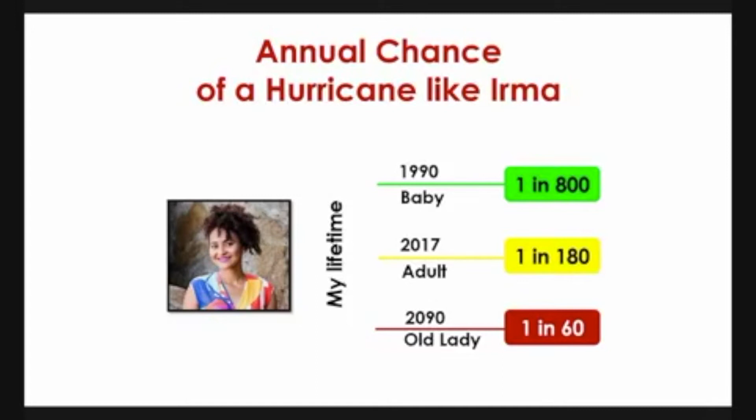Absent any measures to curtail further greenhouse gas emissions, we estimate that by 2090, that probability will have increased to 1 in 60 in any particular year.

When events like Irma become far more frequent, the results will be devastating, until slowly society adapts to the new reality. You've just heard an excerpt from the foreword to the Irma Diaries, written by Kerry Emanuel, a world-renowned meteorologist and professor of atmospheric science at MIT, where he also co-directs the Lorenz Center dedicated to learning about climate. He specializes in tropical cyclones with a focus on hurricane physics.

I want to pair that with a very brief excerpt from the afterword to the Irma Diaries, written by our very own Professor Michael Taylor, who is a senior lecturer and professor in the Department of Physics at the University of the West Indies Mona campus. He is also a director of the Climate Studies Group at Mona. His research interests center around enhancing an understanding of the Caribbean-specific impacts of climate change.

And he says, in a real sense, Irma portends the future challenge of climate change for the Caribbean region. That is the challenge of living in a new era, likely consistently marked by climatic events only rarely seen to date, or by climatic events that have never been experienced before. It is the challenge of living with the unprecedented.

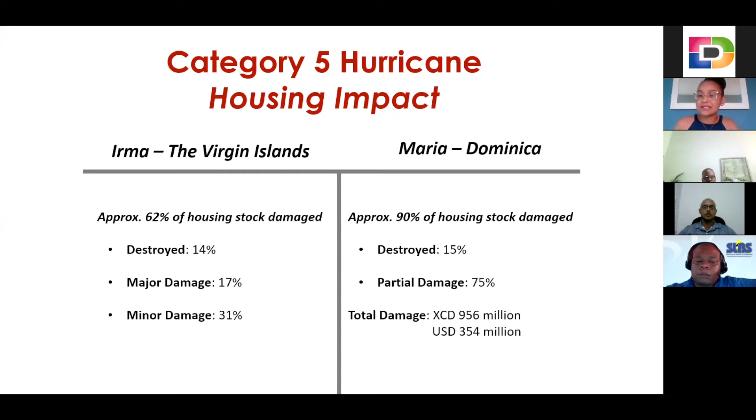So this evening, what I would like to bring to the table is 4 lessons coming from very human, very real, very true experiences from the Hurricane Irma experience that speak directly to windows and doors.

I chose to focus on that this evening because I think we focus a lot on roof and other elements of the structure, but windows and doors are really critical elements that matter significantly in terms of how well your home will survive these types of intense storms.

So the first lesson I want to share with you is that you do not live in a sterile environment. By this, I mean your home is perhaps only as resilient as your weakest neighbor is. So you can't just think about the resilience of your home, you need to think about the resilience of your neighborhood. For this, I will be sharing from the story, Phoenix Rising.

The last call I received was from another cousin in the building who lived on the floor below and had a clear view of our unit. 'Cuz, do not go to your bedroom,' he warned. Of course, as though the warning were a direct invite, my human curiosity instinctively directed me straight to my bedroom.

I glanced through the cracked door. The second tower and its antenna were dangling from cables. The antenna was wildly swinging back and forth, beating against my bedroom window as if knocking on our home, requesting permission to escape the madness outside.

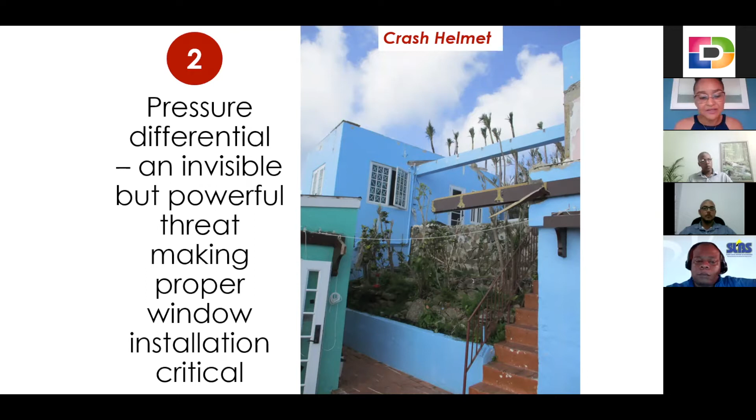Before I had a chance to think, boom, the entire bedroom exploded and the bathroom followed shortly after. Everything went flying, including the toilet. A wall was not left standing. Between the force of the explosion and the winds, I was thrown about 20 feet from the front of the bedroom, clear across the room and down behind it. Elaine was thrown as well.

So a very important lesson on pressure differential and the risk that it poses.

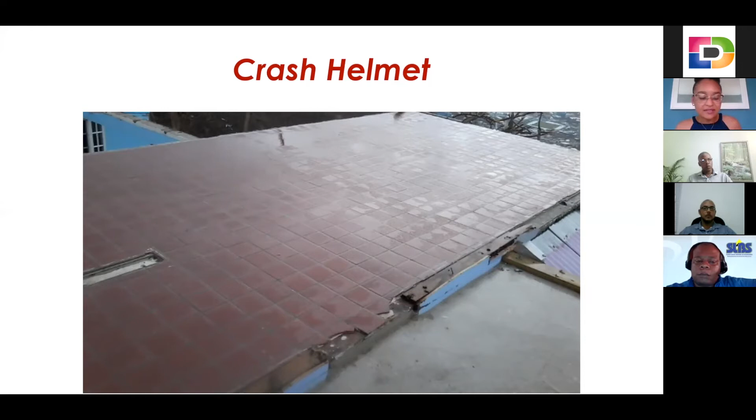The third lesson I would like to share is that windows are often the first point of impact in a hurricane. In fact, I was interested to look back at the 25 stories in the Irma diaries and realize just how many of them started with a simple breach to a window. And not only that, but hurricane shutters can fail, especially under the circumstances of these very strong hurricanes, a Category 5 hurricane.

So for this, I will share with you from the story Gunpoint. A small rectangular glass strip across the top of the wooden living room entrance door allowed us to witness the first strike. It started when the big mango tree that towered over the outside deck gave way, collapsing in front of the entrance door. Shortly after this, we heard a relentless banging coming from upstairs. Peeping out, Tishan realized that a hurricane shutter on one of the windows had come loose and decided that she could fix it. She braved the storm and went upstairs.

With that under control, it was only moments before another issue caught on and intensified. It was now the hurricane shutter in my bedroom that had come loose and started to slam against the closed glass window. We shut the bedroom door that led to the living room to isolate it. Behind the closed door, we listened as the shutter beat the window without mercy, each blow sounding worse than the one before. Then there was quiet. The banging had suddenly stopped as the winds finally took the shutter away.

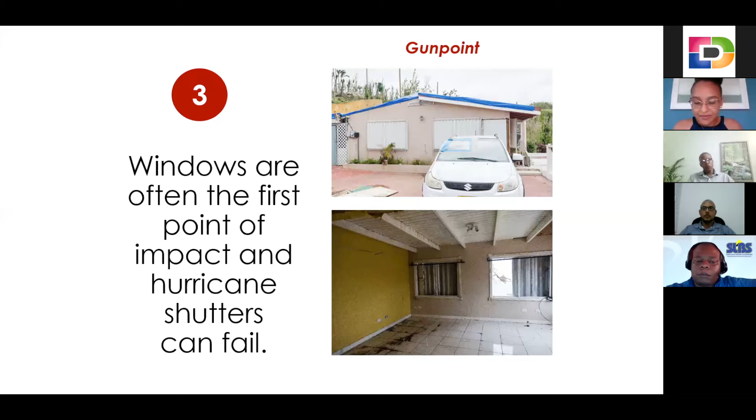Christine and I scrambled behind Chelsea and Tishan into the safe room with only enough time to slam the door behind us before we heard what sounded like a massive explosion. In one fell swoop, everything north of that safe room, including the two bedrooms and the living room, was no longer standing, and the daylight, previously shut out by hurricane shutters, walls, and a roof, poured in. The house was an open sepulcher.

The final lesson I wish to share with you this evening from Hurricane Irma is that doors can also be an important point of vulnerability, in particular your double entry doors or double balcony doors. For this, I will share with you from the story 21 years ago. And I want you to pay attention to that little concrete casing you see on the screen. I'll explain to you the significance of that after.

Back on the main floor, things quickly spun out of control. Standing in the living room, I noticed that one of the interior sheetrock walls started to collapse in my direction. There was no exterior breach to the lower part of the house at all, but the sheer pressure and wind force was shifting the wall off base. In pure desperation, I took another length of 2-inch by 4-inch wood, propped it up against the base of the wall and nailed it into the floor to try to hold the wall in place.

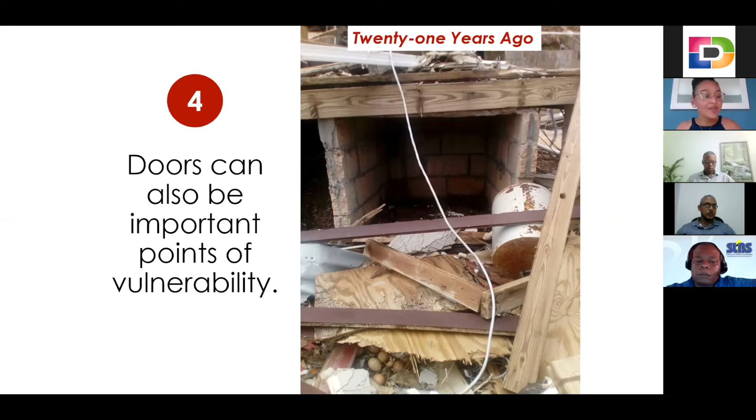So with that, I'm going to end my segment of the readings and just quickly share with you, I think, 2 very practical and important tools that you can use right here in St. Lucia to go about the business of making your home more resilient.

The first is the Act to Adapt app. This has recently been launched by the SLDB, the St. Lucia Development Bank, through its climate adaptation financing facility. Essentially, it's a web application. Anybody who can access a website through a device can use the app. It is freely available and it helps homeowners to basically go through a very simple step-by-step guided assessment to understand.

Actually estimate the level of impact that their home would experience in a Category 5 hurricane, but not just that, actually understand the points of weakness, points of vulnerability in the structure, and be able to appreciate the types of improvements that they can make and actually see how those improvements will up the ante, will actually help them to increase their resilience. So I encourage everybody to check out that app.

I think this is such an important facility, again, administered by the SLDB, actually as a component of the Disaster Vulnerability Reduction Project. And this is an opportunity for homeowners, business owners, farmers to access very low cost, affordable financing to be able to implement any measure, including putting in hurricane or impact resistant windows and doors that would build their resilience to climate change impacts, including stronger hurricanes.

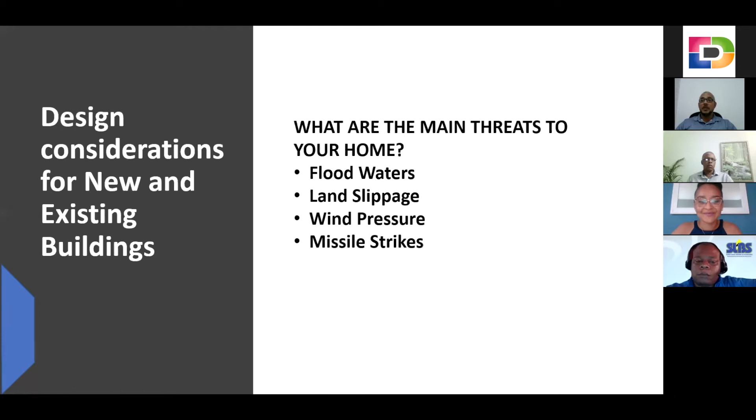Land slippage as well is something that's common to us. However, those two are not usually something that you personally can do much about. It usually has to do more with what is in the community, what is in the neighborhood, the infrastructure in place. But apart from appealing to the authorities to ensure rivers are cleared prior to the hurricane season, one of the main things you can do, if you're building or planning on building, is get a professional to do some soil tests for you.

Check to ensure that the area you're building is stable. There are many areas in St. Lucia whose soil types don't really support large houses. And especially, you have to look out for the drainage in the area where you're going to build as well. If you're just buying land, look for an area where there's proper site drainage, large box drains to take all of that rainwater away.

If you have built already, try to ensure that all of the rainwater coming off of your roof runs down drainage pipes and into your site drains, which then connect into the community drains. It's important because you'd be surprised how much water comes off of your roof, and the larger your house, the more water you have coming off of that roof. If all of that water is going into the soil directly around your foundation and you're on a slope, you're making that soil more prone to slippage.

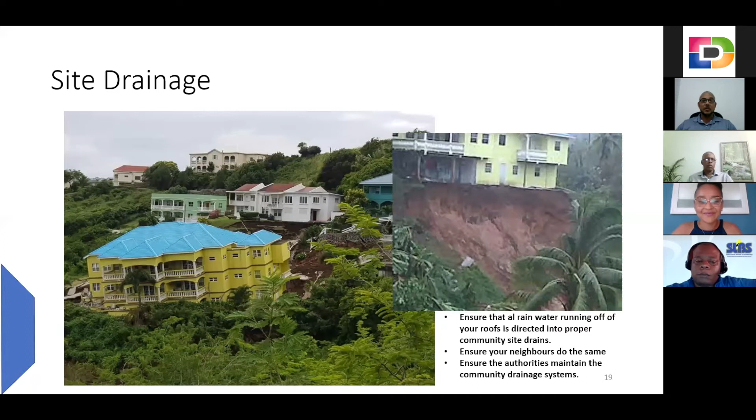Whoops, it looks like Jamal's internet is frozen. While we're waiting to have him come back, perhaps I'll go ahead.

This is Terry Ort from Domus. So if you do get reconnected, Jamal, please just come in. But in the spirit of keeping things going, first of all, there are many different roof types, and just to say that the hip roof is the best kind of roof to have, because it has the least amount of impact or exposure to the winds.

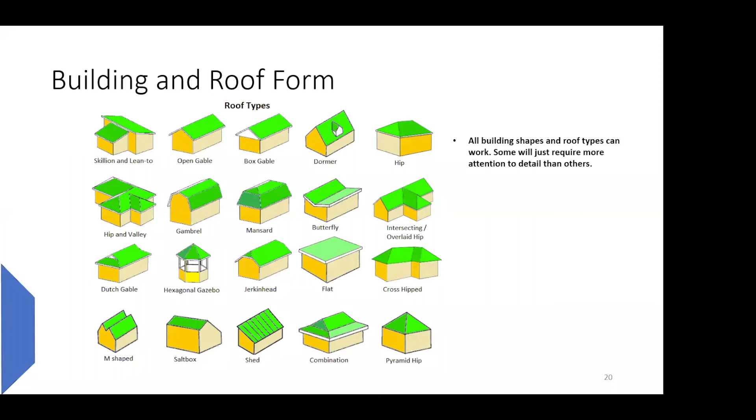Yeah, it looks like Jamal's dropped out. So what happened? I apologize, I'm not sure what happened. Where did I get cut off?

You just before we pulled up the slide, you talked about the house sliding down. So I pulled up the roof and was just mentioning hip roofs are probably the best to have. But go ahead, okay, all right.

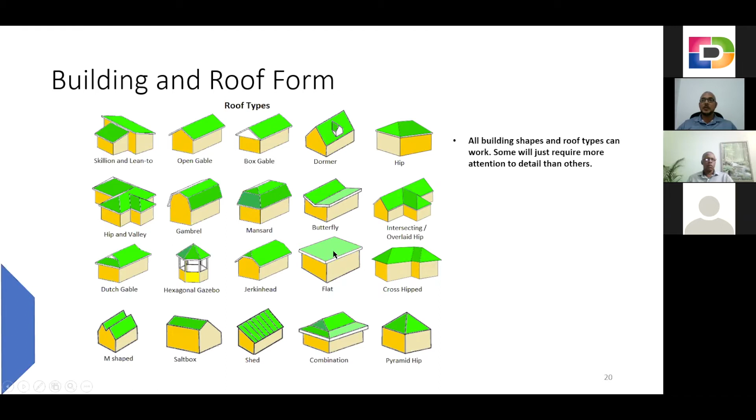This slide gives you an idea of most of the types of roofs used in the Caribbean and most parts of the world. The best design for our region is the hip roof or a flat concrete roof. Gable roofs are fine as well, as long as they're well braced. Let's move on to the next slide.

Now in the Caribbean, the sweet point for a roof, the most adequate slope, is considered to be a 30-degree roof. A 30-degree roof typically holds up best in a hurricane. Anything steeper, and what happens is if this side of the roof is steeper, you start to get more pressure against it.

Also, on the other side, you will get more suction because as the wind goes over, it creates that swirl and pulls against the roof on this side. A shallower roof would have less suction on this side, but on the side taking the wind, you will actually build up suction as well, the shallower your roof is. A flat concrete roof will get suction on it too, but because it's concrete, it's not as easy for it to be lifted off.

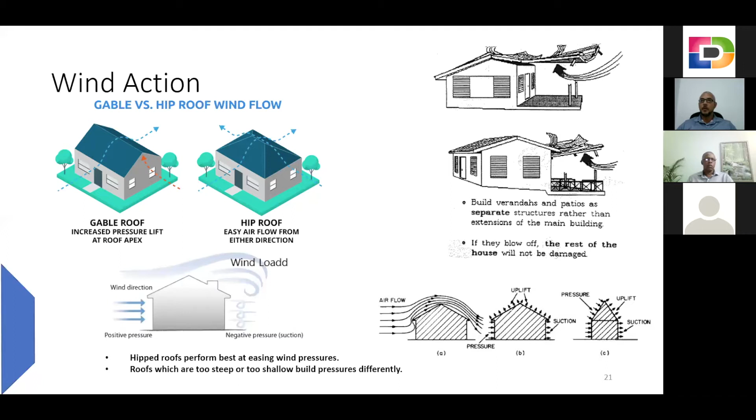So if you are designing or building, this is a suggestion for your balcony roofs: try to separate it from the main roof. If you have an existing house and your balcony roof is connected to your main roof, it is still within the realm of possibility to remove the roof over the balcony and create a second section of roof just below the eaves of your main roof.

Next slide. Okay, so here I would like to speak to what happens when, as Angela said, one of the main ways houses are destroyed in a hurricane is when windows and doors fail. Whether it's because you didn't have impact-resistant windows or the windows weren't pinned properly, you need to ensure this is understood — this is how the wind reacts when it enters the house.

If the wind comes in through one window and there's no other opening, it is going to try to find an exit. It is either going to blow out another window or it is going to go up through the roof and rip the roof off.

Open plans and cross ventilation will help save your roof by having another window blown out instead. In other words, if there was a window on the other side of that wall, the wind could rip straight through the house. Of course, it would take all of your belongings, but your roof might still be saved. If you don't have cross ventilation and there are a lot of walls between one window and the other, it's the same thing — wind pressure will build up in there and the roof is liable to be lost.

Couple of points. The size of your windows obviously makes a difference. The bigger the window, the stronger it has to be.

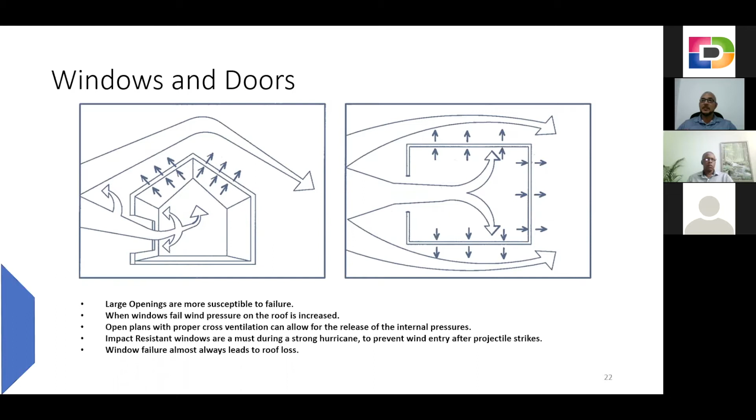In the Caribbean, we usually advise that when installing a window, you try to ensure that the plaster on the inside of the house overlaps the edge of the window. That helps to provide a bit more pressure and resistance against the wind pushing that window into the house.

As Angela said as well, the walls themselves can fail. Even if your windows don't fail, even if your roof doesn't fail, your walls can fail you. And if the windows and roof fail, it's even more likely that the walls can fail.

What will help your house stand in a hurricane is not the concrete blocks themselves. Concrete does not flex. You need steel in those walls.

If you're now building or planning on building, ensure that your design caters for vertical and horizontal steel. This will help not only in hurricanes, but also in earthquakes.

You need to ensure that this steel running both ways goes from the foundation all the way up to the ring beam, and if you have a concrete roof, into the roof as well. That ties your roof and floors down to your foundation, which is under the soil, so everything is tied together and holds together well.

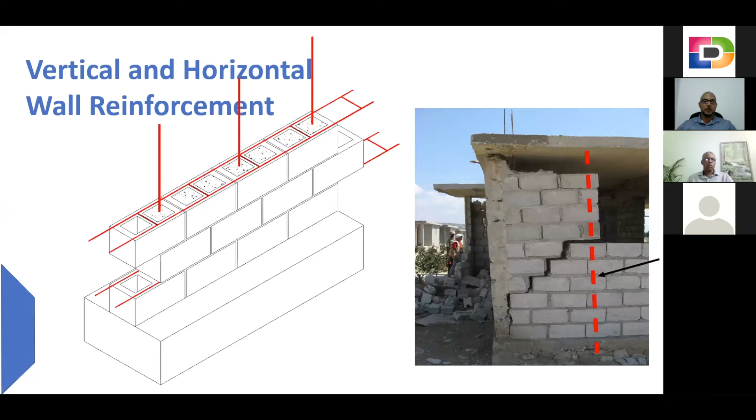There are details where you use a single bar running through every course or every other course of blocks, and that ties itself all the way around the house, tying the vertical reinforcement together as well. The vertical reinforcement, as I said, goes from foundation up to ring beam.

In a timber structure — and remember, I always try to remind people that timber structures can survive these hurricanes — I've heard many stories in Dominica of persons abandoning their concrete houses and passing the storm in the little timber house next door with their uncle or grandfather, which stood up to the hurricane.

Because timber flexes, it moves with the hurricane. It moves with the winds and the pressures. But of course, it has to be built properly.

Everything has to be anchored. Everything has to be screwed. Do not use nails, use screws or bolts.

When you are running your bottom plate to the floor, try to bolt it onto the floor, don't use screws or nails. In a concrete house, remember, you had the steel running into the foundation. In a timber house, you don't have that, so this is what secures the bottom plate to your floor and to the foundation.

Bracing is important as well. If you're currently building a timber house, try to ensure that you have bracing at all the corners. If you have an existing timber house, it's pretty simple to open up certain sections and include bracing in those corners — timber houses are a lot easier to renovate in that regard.

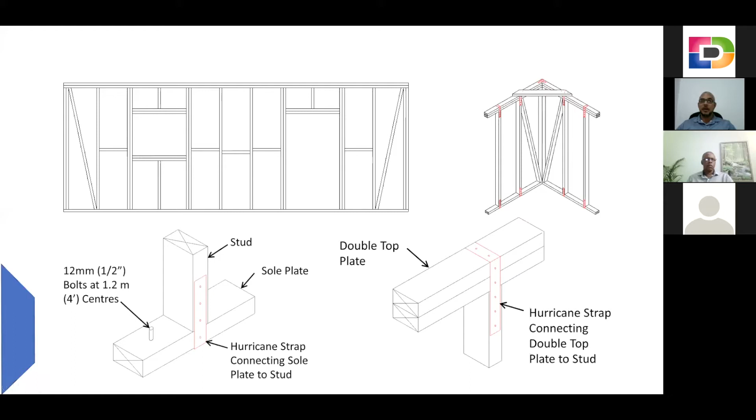Okay, let's move on to the next thing.

Roof connections, hurricane straps have become pretty commonplace in St. Lucia. Everyone knows of them. I think most people by now understand that you need to have hurricane straps. However, the installation of hurricane straps is important as well.

If you have a concrete ring beam or concrete walls with a ring beam on top, the best way is for a hurricane strap to be cast into the concrete, protrude out, and then your rafter is screwed onto that hurricane strap. Many times contractors will just run a steel bar through the rafters and cast it, but that actually weakens the rafter. Try your best not to do that.

The most advisable solution is to have your straps cast into the ring beam. On a timber house, it's the same way. You have your double top plate, and you can have those hurricane straps screwed directly into the top plate and onto the rafter.

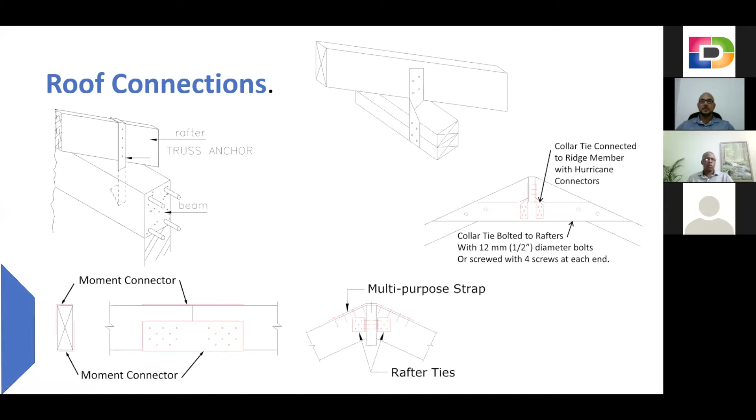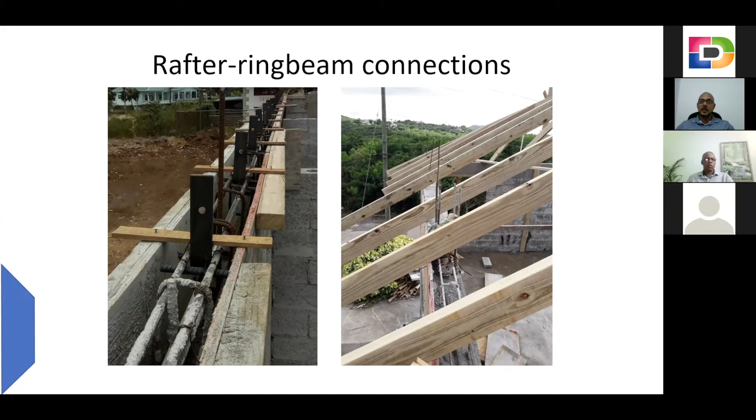On the right-hand side, it shows the rafters sat onto a ring beam that does not have hurricane straps. What some people tend to do is have vertical steel protruding out of the ring beam, bend it over the rafter, put a couple nails in it, and call that a strap. It doesn't work the same way. When pressure from wind impacts the house, those will raise off.

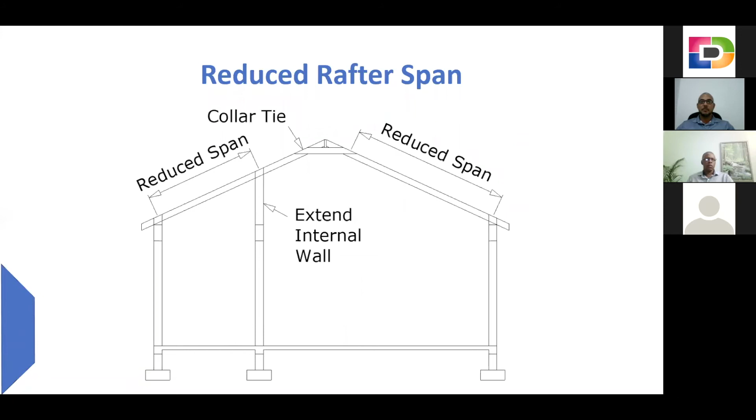This image shows what happens when you have a span that is too large - you will have failure in your roof. The pressure from wind bearing down on the house will snap your rafters, unless you have massive rafters like 2x8s or 2x10s. Try to keep your span as minimal as possible. Some ways to do that: ensure internal walls come all the way up to the rafters to break the span and provide support. You can see the collar tie at the top, and you can install another collar tie below if you want. All of this helps brace your roof and prevent it from buckling under external or internal pressure.

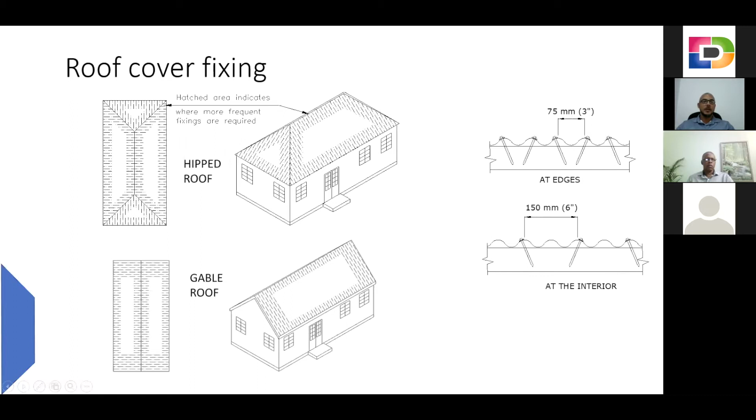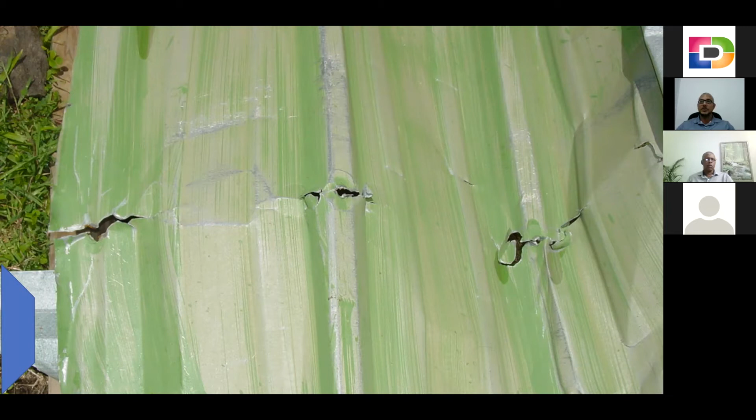So in closing, I just wanted to run through a couple of things. Remember, it's in your best interest to use professionals for your projects. Not everyone who knows how to use a drawing program and can produce pretty renderings is qualified or experienced enough to give you a good design. Keep in mind that it's a major investment on your part, and registered professionals tend to have liability insurance. They take liability for any design that they do, and if they supervise it, they will take liability for that as well. So if anything, they can be held accountable if anything goes wrong with their design.

Building form, fenestration, which is the windows and doors, and structural integrity all play their part in making the home resistant. So don't pay attention to one and ignore the other. They all tie together.

Ensure that you have someone independent of your contractor overseeing or double checking their work. This is very important, I keep stressing to people that supervision is important. A contractor having their foreman on site is fine, the foreman is looking out for their interests. He may try to ensure that quality is maintained, but you want to have someone outside of the contractor's influence to review their work, especially at important parts.

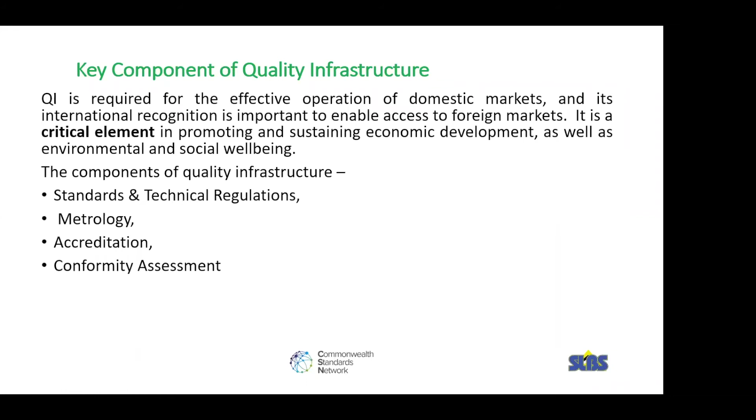The key elements of the quality infrastructure, which is critical in promoting and sustaining economic development as well as social well-being, are standardization and technical regulations, metrology, accreditation, conformity assessment, market surveillance, and quality promotions.

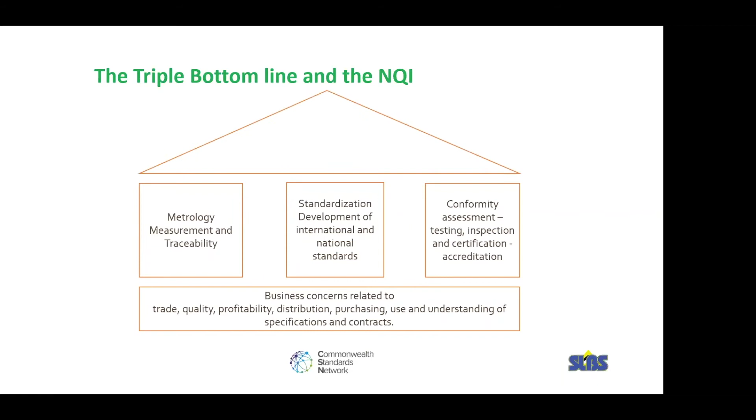As we reflect on how the quality infrastructure interfaces with the wider economy in ensuring sustainability, in terms of business concerns related to trade quality, profitability, distribution, purchasing, the use and understanding of specifications and contracts. Metrology, measurement and traceability, standardization, the development of international and national standards, conformity assessment in terms of testing, inspection, certification, and accreditation. So in our building, this all brings us to a net result to address all societal concerns of health, safety, environment, economic well-being, fair trade, consumer protection, and regulations.

We are part of an international network which allows us to do the necessary conformity assessment for both building materials and manufactured products. SLBS has agreements with ASTM International and UL to allow for the conformity assessment of all products coming into St. Lucia and all products produced in St. Lucia.

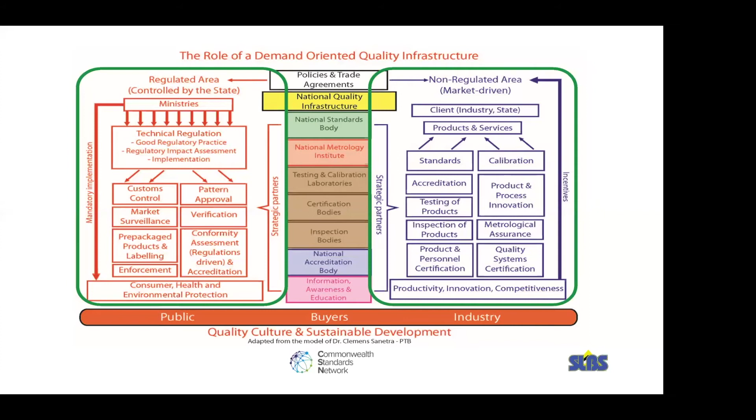In 2015, the OECS building code was revised with special application to St. Lucia. The code is not a standalone document and it must be used in conjunction with other design codes and reference documents.

The specific areas of our building code with regard to hazard forces is design wind speeds and design wind pressures, which was updated in section 12, wind speed increases expected due to climate change, earthquake spectral accelerations for St. Lucia, and rainfall intensity frequency duration curves for St. Lucia.

In 2018, the CARICOM Energy Efficiency Building Code was approved, and it is built on the International Energy Conservation Code. One of the key areas for the Energy Efficiency Building Code, specifically with regard to windows, is the general area of glazing, which is the solar heat gain coefficient.

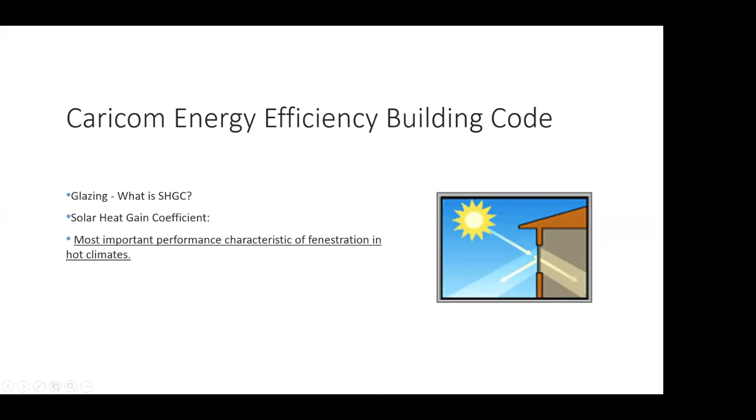The solar heat gain coefficient is an important coefficient, the most important characteristic for fenestration in hot climates. In dealing with the solar heat gain coefficient, one of the critical areas is the projection factor, which is the ratio of the depth of the leading edge of the overhang to the face of glass over the height from the bottom of the leading edge of the overhang to the top of the window sill.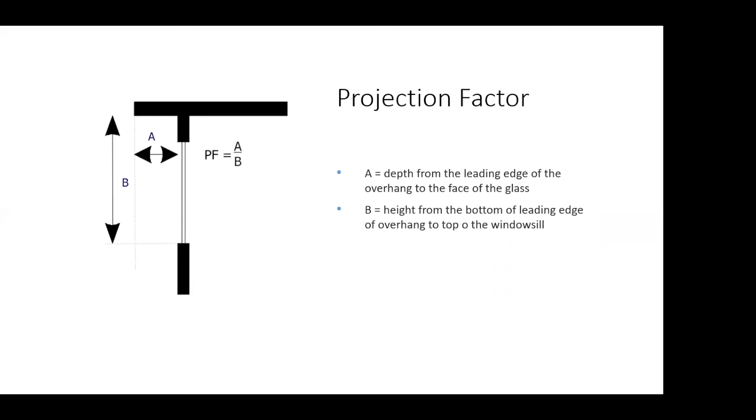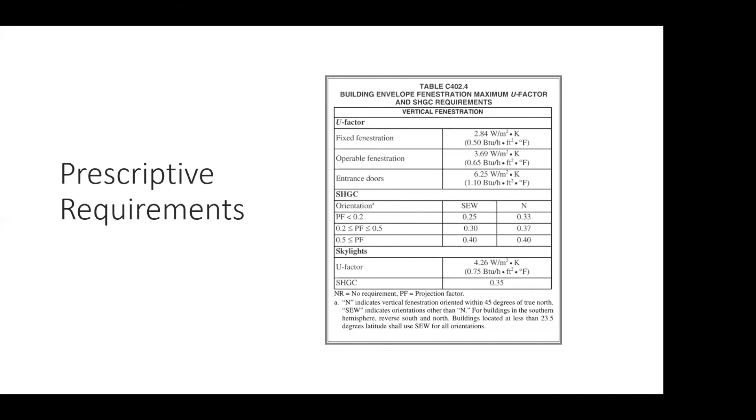Jamal would have shown specific areas with regard to overhangs, and the energy efficiency code deals with most of them, especially based on your solar heat gain coefficient and the orientation of your building, where the projection factor is directly linked to the solar heat gain coefficient.

The other specific area for windows is the fenestration air leakage, and the building code speaks specifically to areas of windows, sliding glass doors, and skylights, along with exterior swinging glass doors.

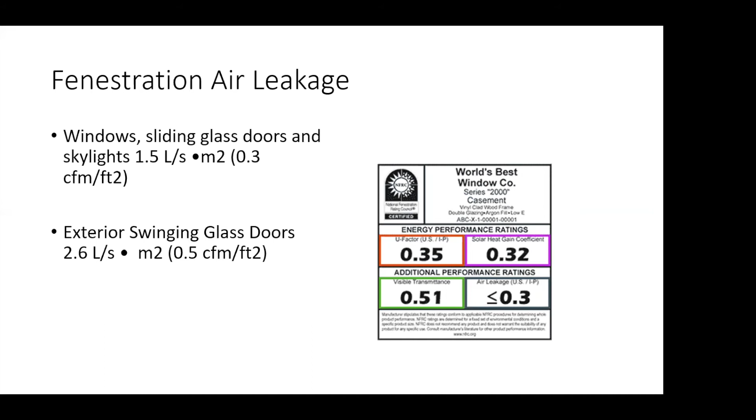For example, we have an example here of what a conformity assessment certificate, which accompanies a certified window, would look like, indicating where the window would have been tested for its energy performance ratings and additional performance ratings for visible transmittance and air leakage. In closing, I would like to encourage you to visit the SLBS's website.

We have a list of national standards and building codes, and we can make available all the necessary measures to ensure quality in your building performance. Thank you.

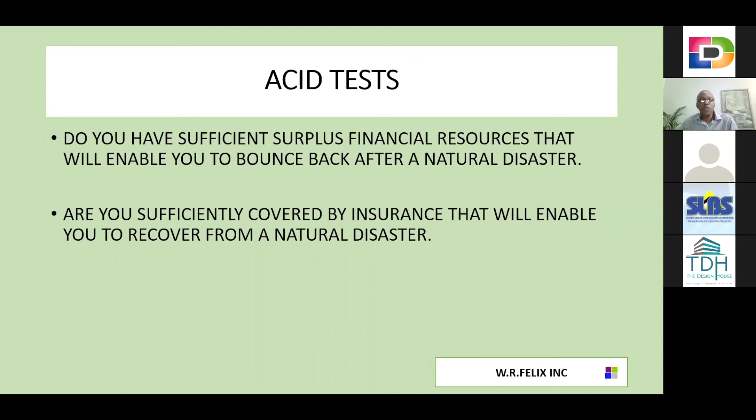Essentially, after a major disaster, the key question, or should I say the acid test, is do you have sufficient funds so that you can bounce back, or are you adequately insured?

We must recognize why people build their homes. First, for shelter, security, as an investment purpose vehicle to start their families. Traditionally, some families require by the time you turn 18 or 20, you should move into your own home. Some people, it's a status thing. They made some money, then they want to show that they can afford a very nice house. But it comes down to that key question: how much does it cost?

And you'll be surprised to see the reaction. The first thing is that it's too expensive. Or can they get something cheaper, or are there other options that are available? We will see that cost. Sometimes you might be fortunate enough to buy into a planned development, but there are other persons who may not be that fortunate and may have to just settle for unplanned developments by setting up their shingles by any means necessary.

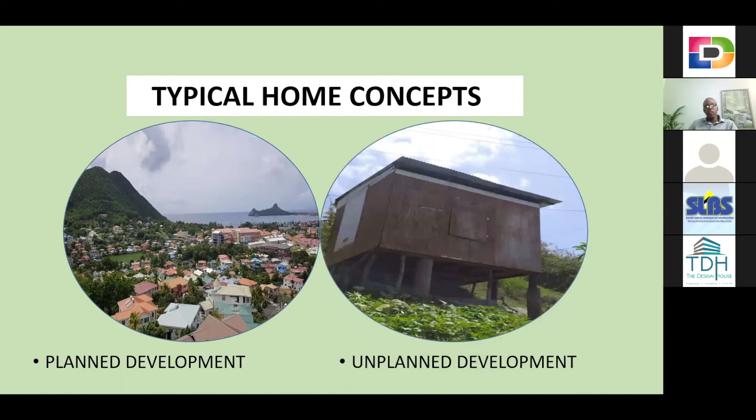One of the key things after a disaster is to look at the cost drivers, is the availability of labor. For example, if a storm strikes today, the craftsmen would basically try to fix their own buildings first, and thereafter go and fix another person's building.

There's also the issue of availability of materials. We live on an island, and we have to fly things in. The lead time might be 4 to 6 weeks, and you may not have all that time to put a roof over your head.

The other thing is the availability of standards. People build based on what is in the marketplace. So it's pointless me telling you to get a hurricane-proof window if I cannot find it in the local marketplace.

The other issue to look at is the enforcement of the standards. Cayman Islands does a very good job of that. Every section of your development has to be inspected and certified before you move on to the next stage.

We look at the availability of information. If people do not know any better, they will stick to what they know. And of course, this is why we encourage you to get professional advice.

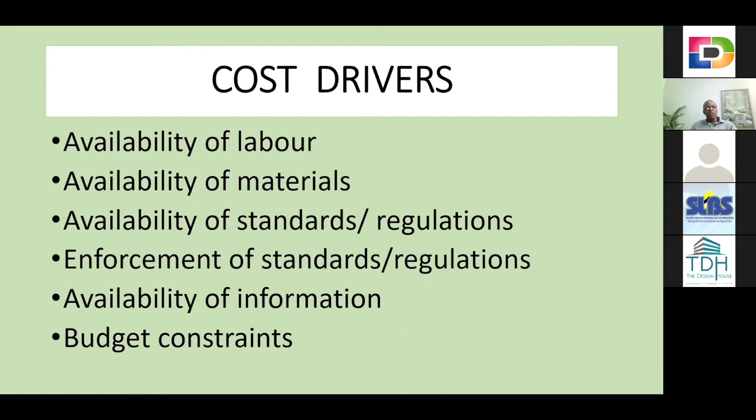The key issue comes down to budget constraint. How deep is your pocket?

In all of this, our housing stock is a reflection of our economic situation. Most persons would want to have the most durable structure. Unfortunately, it might be something that you just cannot afford.

On the other hand, we have a property tax system that is skewed in terms of promoting inferior housing. If you look at Barbados, for example, most houses would appear unfinished because people do not want to pay that excessive property tax. So they may choose an inferior alternative.

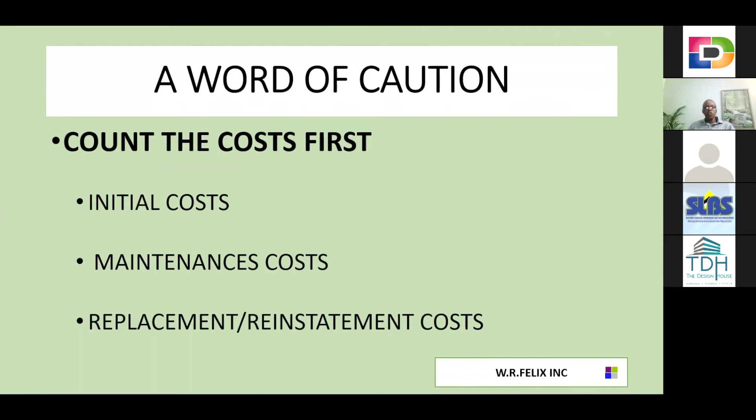Now, cost - you must look at three main components: the initial cost, the maintenance cost during the life of the structure, and then the replacement cost thereafter a storm that you need to get over.

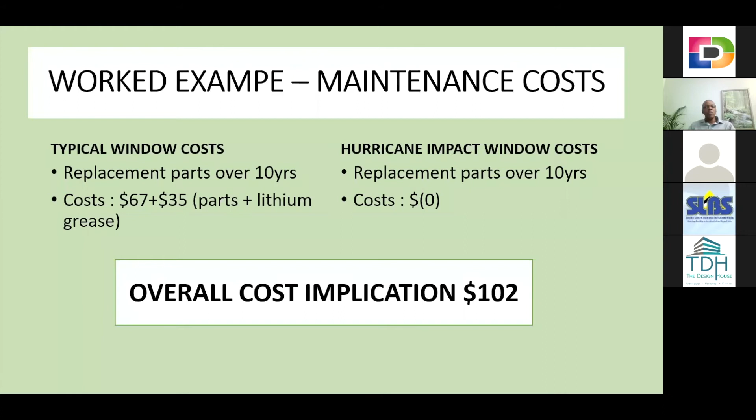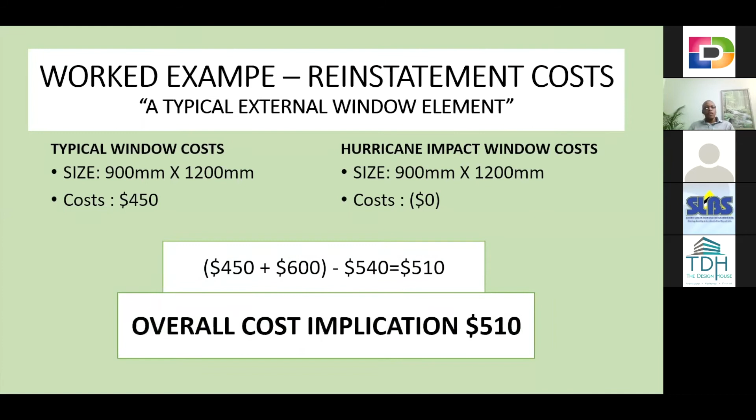Sorry if I'm running, I'm just trying to catch up with time. I try to create a situation looking at the general fabric of the building - look at the various elements, the roof, the wall.

Now, this is a building of 1,400 square foot with a cost limit of $450,000. If you look at the roof element, which attracts $63,000 - so in case a hurricane or a major storm came about, you would have to look at expending another $63,000 plus. You may have to look at other costs.

Such as inflation, demolition costs - you may have to take out the bits that remain and dispose of that. And at that time of replacing that element, the cost may have been inflated. There's the additional professional fees in terms of the guidance required, and of course the planning and statutory fees in order for you to get the necessary approval to move forward.

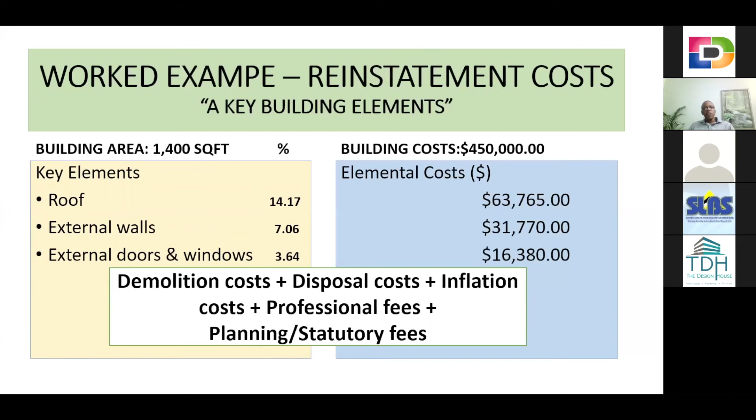There are additional cost factors, such as increased insurance premiums. You will also incur delays and disruption costs. You may have to move to another property whilst work is being conducted. And there's the emotional cost, the loss of items with fond memories. And the worst thing that could ever happen is loss of life. That's a massive cost.

Generally, it will cost you cheaper to ensure that the entire building envelope is resilient to natural disaster, because you will pay for the reinstatement cost in the future. Most people think they're saving something here, but they may not recognize that the extra cost you incur initially in capital outlay may end up being cheaper in terms of opportunity cost.

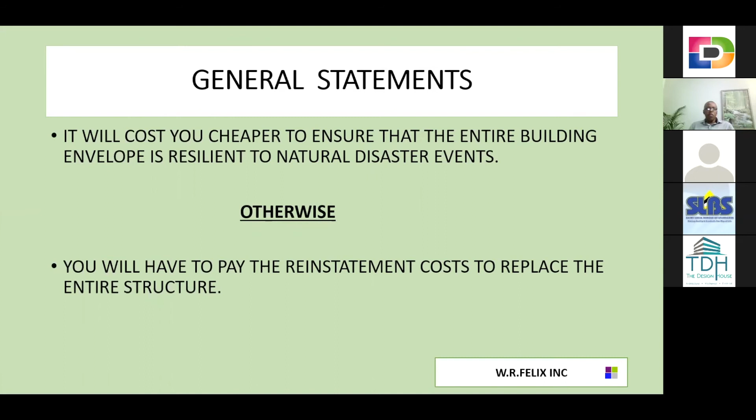We in the Caribbean tend to be rather reactive as opposed to preemptive in our approaches to things. I'm cautioning everyone to adapt your existing structure, make the necessary modifications, or you'll pay the additional cost in the future. If you're building a new structure, ensure that all the components are resilient. It will be a costly element, but it will be discounted over time. I am aware of local financial institutions who offer climate adaptive financing.

I did mention that about long term, but one interesting thing before we go to the next slide: our GDP component, when we look at our build stock, St. Lucia projects $12 million from 2016 to 2018 per annum. Based on property tax rates of 2.5% for residential and 4% on commercial, that would indicate a stock value of $1.92 billion for residential property and $1.8 billion for commercial, giving an overall $3.72 billion asset worth.

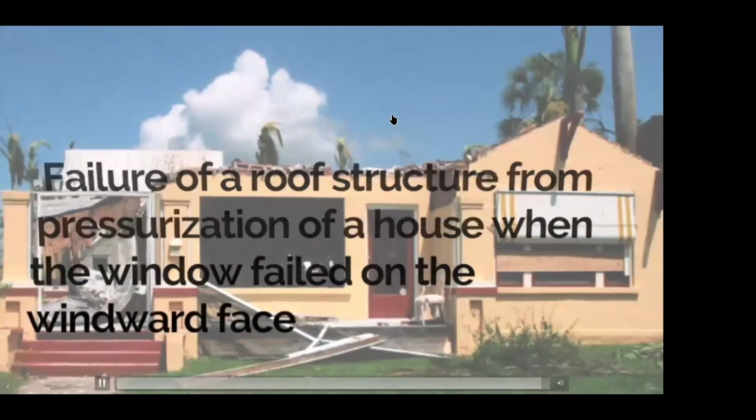This particular picture is very illustrative. You can see that the large window in the side of the house failed. The wind got inside and it exploded from the inside out, which is why you really want to keep the shell of the building intact. In most building destruction, it starts off with windows and doors failing first, or the hurricane shutters. Then pressure builds up inside through the openings, and the internal pressure lifts off the roof, either partially or the walls are pushed out. You saw this very often in Dominica, where a corner of the roof would be lifted and not the entire roof. But when all of this happens and the roof disappears, then the whole structure can fail, and you certainly saw some of those pictures from Irma and Maria as well.

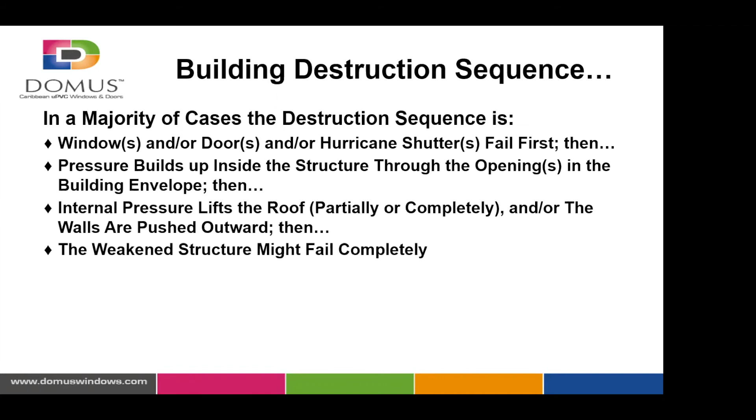Now, the reason that very intense hurricanes are so dangerous is the wind force. If you look at a category 1, you're talking about 15 pounds per square foot. Get to a category 3 and you're almost triple that.

If you get up to Irma and Maria, then you're up about 5 times the pressure on the windows and the whole structure that you would have in a category 1 hurricane. That's also 3 times a Cat 2 and about double from a Cat 3 and into Cat 4 territory. So the extremely high pressure of these intense hurricanes, the wind load, is really the thing that kills buildings.

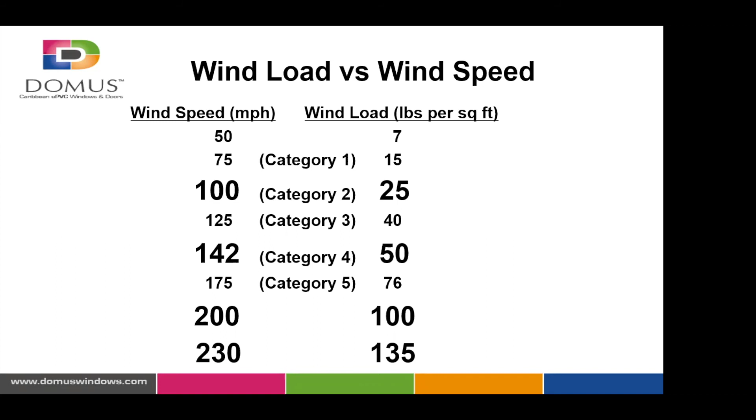That was very obvious in the BVI, in St. Martin, and also Anguilla. So the reason there's so much force on the roof is that when it gets inside, it builds up pressure, and all of that is distributed around the roof.

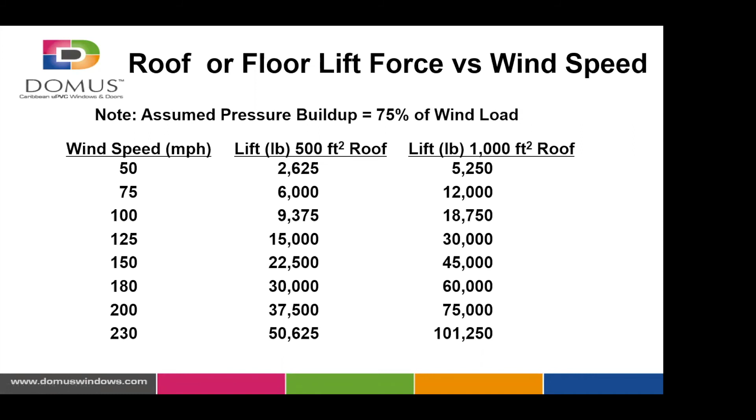If you had a 1,000 square foot building, which is not very large at all, and you only had 75% of the wind load pressure inside, you can see that when you get up to the most intense hurricanes, you could have up to 20, 30 or more tons of lift on that roof. Whatever you do to the roof, it's going to go, because that amount of lift is just irresistible.

So windows and doors failed, as you saw in the video, either from airborne debris, or another issue which happened over and over in St. Martin was rubber gasketed windows. If you have rubber gaskets around the windows, there's no way they are going to survive a hurricane. Either they get hit, even if you've got laminated glass in there, the glass flops around and pops out, or in many cases the glass simply bends and pops out.

In St. Martin, the vast majority of windows and doors failed for that reason. The other thing is the wind force can cause the entire window or door to be removed totally from the opening, either due to structural failure of the window and door, simply not strong enough to stand up to that kind of pressure, or insufficient fasteners around the perimeter, where the fasteners are too short so they bend and pull out under wind load.

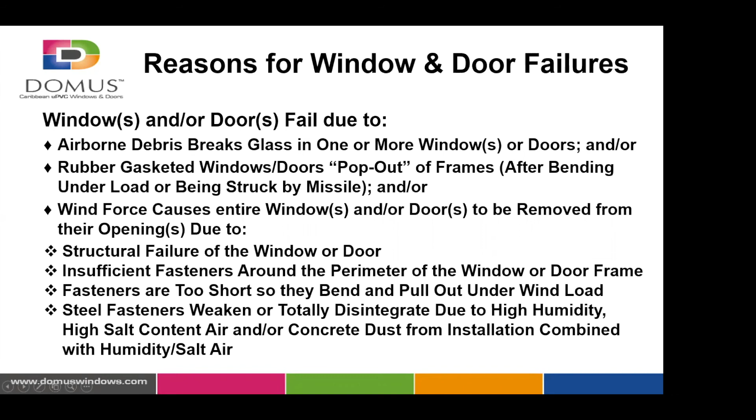Or you can use steel fasteners, which when put into concrete with a concrete drill, you have all of that concrete dust in between the two edges of the window. Then moisture builds up, that creates a toxic mix, and it eats the entire screws. We've seen many windows a few years down the road where there's nothing left of the screws holding them in.

So hurricane shutters are fine maybe if you have a Cat 1 or Cat 2 hurricane. As long as you can guarantee you're not going to have any more than about a Cat 3, they may be okay. But almost all hurricane shutters are only rated to 140 miles an hour, and Irma actually was 70% above that rating, which is why almost all hurricane shutters failed in St. Martin and other places.

Not only are they not rated for the highest winds, but very often they're put on oversized relative to their specified maximum dimensions. The other problem is wind load can sometimes deflect the shutters sufficiently to pull them out of the rails, or they could have fastener failure. So hurricane shutters, I'm afraid, are more of a liability than they are an asset. That was proven over and over again.

One of the things in St. Martin, we had a building that had all of the high impact hurricane resistant windows installed. And then the owner decided he was going to protect them with hurricane shutters. We came along after the hurricane, and sure enough, the ones that were not protected were cracked. They had missile strikes, about 2/3 of them.

But then the windows with shutters on were completely gone. The shutter hammered the glass out. Eventually the glass disappeared, the shutter disappeared. The wind came in and destroyed the building, which wouldn't have happened had it not been for the shutters.

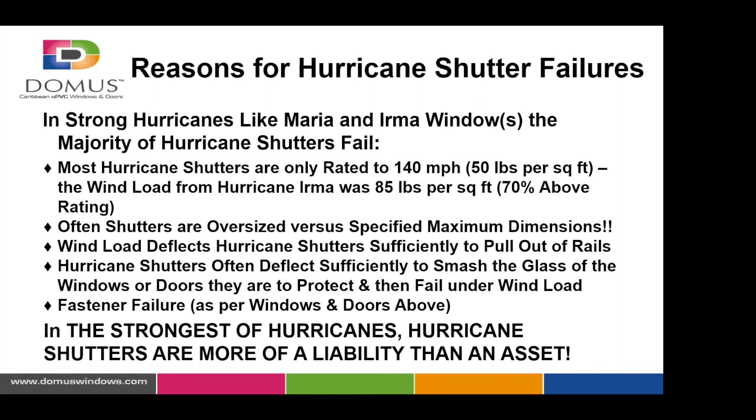So there are three basics to windows and doors, and if you're going to buy them and you're not really sure, check these three things out at least. First of all, are the frames, mullions, etc., strong enough to stand up to the highest wind speeds? That means they should have a wind load test to it. And I'll talk about the level that you need these days.

The second thing is the glazing needs to be capable of surviving multiple missile strikes, so it requires a very strong laminate. There are some laminates available locally throughout the Caribbean, but 95% of them are too thin to stand up to any kind of impacts.

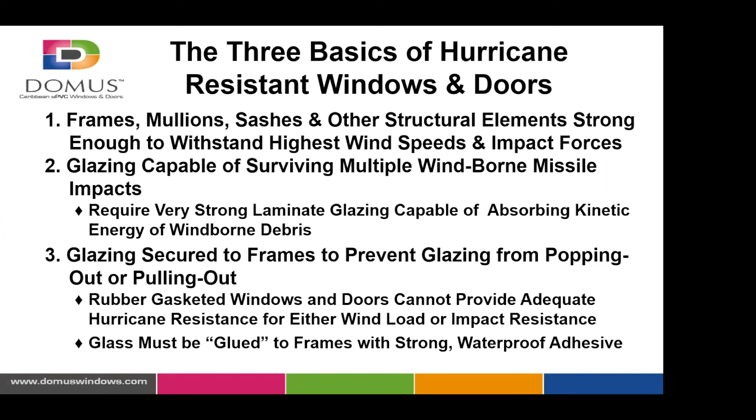The last thing is that the glazing needs to be secured to the frame, because otherwise, when it gets hit and becomes flexible, it'll simply pop out. Rubber gasketed windows don't do it. What you need to do is glue the glass into the frame with a strong waterproof adhesive.

It was mentioned earlier that installation is critical. First of all, your fasteners need to be able to retain their strength for the life of the building, which requires high-grade stainless steel, preferably coated to be impervious to salt air. We coat ours with Xylan. You put them in a pail of salt water, leave them there for a year, take them out, and they will see no deterioration.

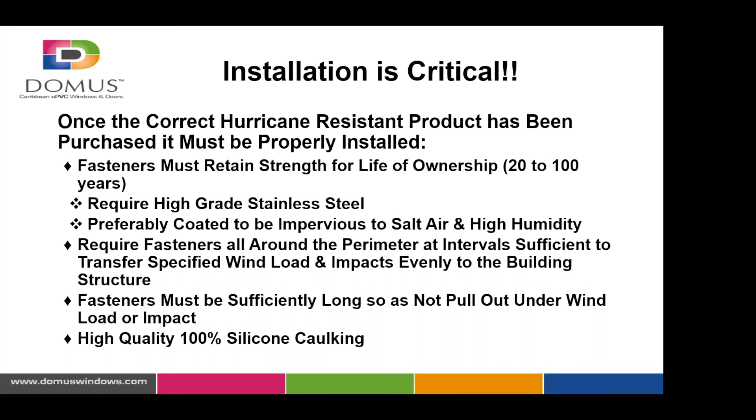The other thing is the fasteners need to go all around the perimeter at intervals sufficient to transfer wind load. Our spec is not more than 4 inches from each corner and no more than 16 inches between screws. The fasteners must be sufficiently long so they don't pull out, bend, or pop out when under wind load. That's why we use 3-inch long screws, at least 1 inch of which needs to be into an opening that's not much bigger than the screw so it'll bridge against the side, and also using 100% silicone caulking.

So after 15 years in the business now as an engineer, manufacturing, testing, and observing different products in real life experiences, we have now developed 2 product lines. One of the things is that the high impact hurricane windows are extremely expensive. They can be 2 to 4 times the cost of a regular window, and that prices it pretty much out of the market.

But we found that our least expensive window, with a laminate glass that we use, a security laminate glass, actually performed almost as well in Hurricane Irma in St. Martin as the high impact one. So we've now come up with an economical hurricane line that everybody can afford. It's an increment over the regular windows, but everyone can certainly cover it.

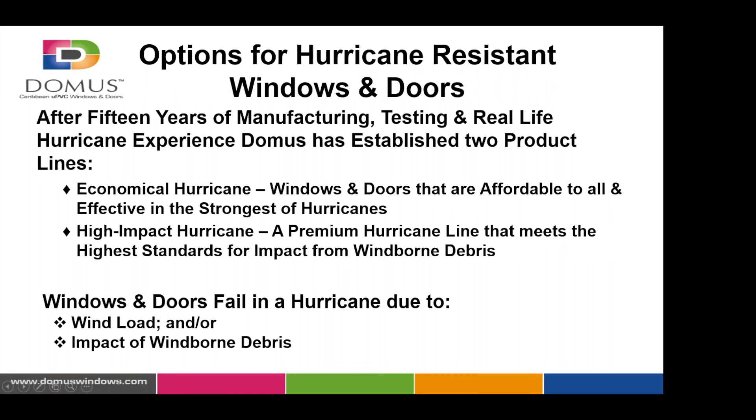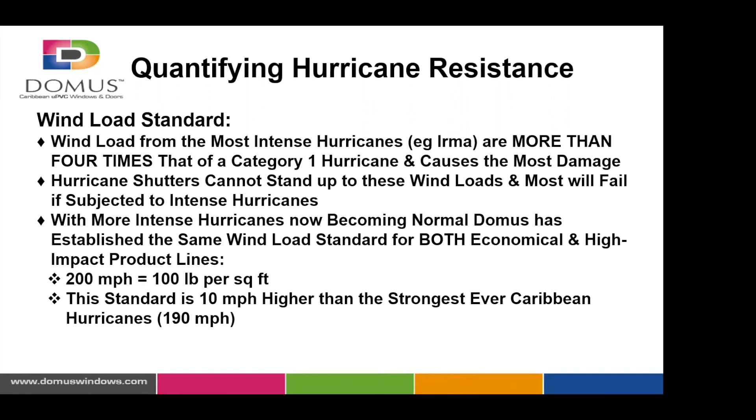In terms of the wind load standard, mentioned before that the wind load from the most intense hurricanes is more than 4 times that of a Cat 1. Shutters can't stand up to these wind loads, and they'll fail almost completely in intense hurricanes. So with more intense hurricanes now becoming normal, we have adopted the same wind load standard for both the economical and high impact product lines, which is 200 miles an hour, 10 miles per hour higher than the strongest ever Caribbean hurricane.

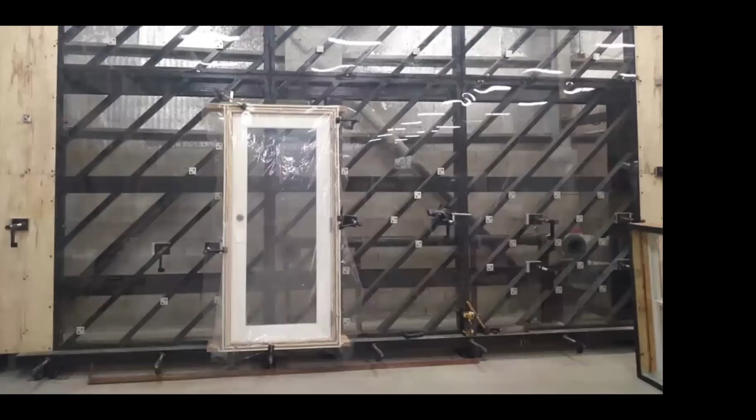To test for wind load, you put it against a test wall. This is our test lab. You then put it in a buck, seal it up around it, and then extract air. We can actually test up to 250 miles per hour equivalent.

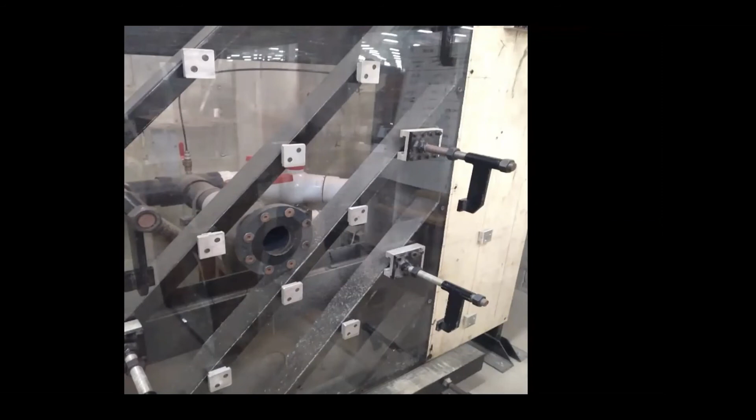This shows what happens when wind load is excessive. Now, this is the inexpensive window that did so well in St. Martin during Irma. We took it to a lab that didn't have our test lab done, this was in the US in West Palm Beach, and it failed at 264 miles per hour. So clearly, it's a very strong little window.

The next thing is quantifying the impact. There are 2 impact standards. For our economical hurricane line, we use 3 blows of ASTM-E 1996 Missile C, which is a 4-foot-long 2x4 fired from a cannon at 40 feet per second. This again is the test of that same window.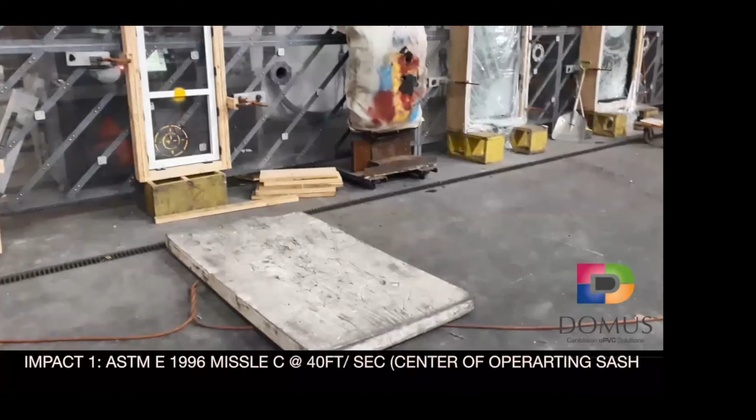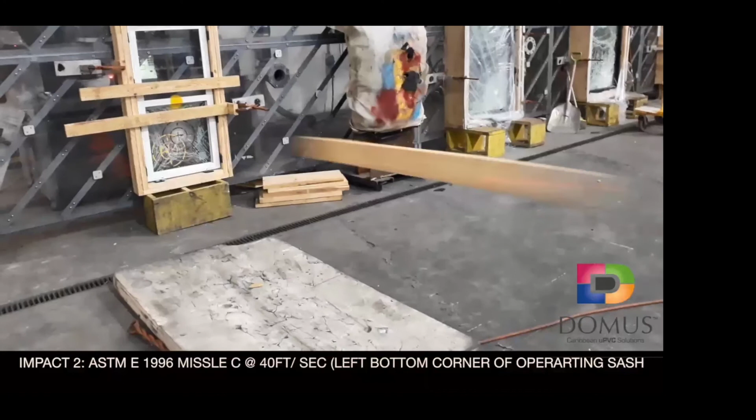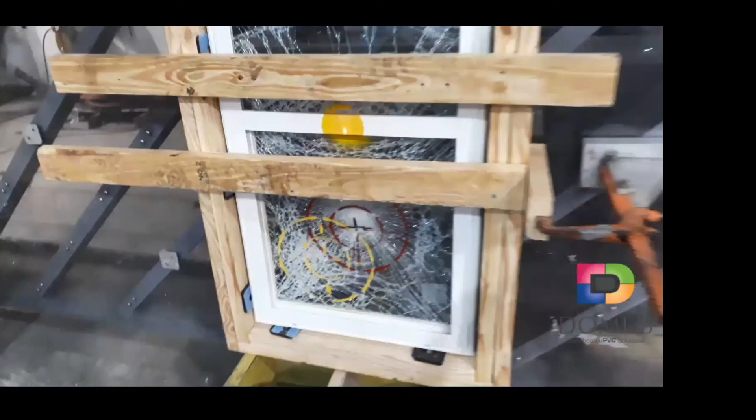You'll see the window is very damaged, but it's only the glass, that can all be replaced. The point is the hurricane would be on the outside. Now that is the lowest, our economical one. But still, as you can see, there's a very good thump from that Missile C.

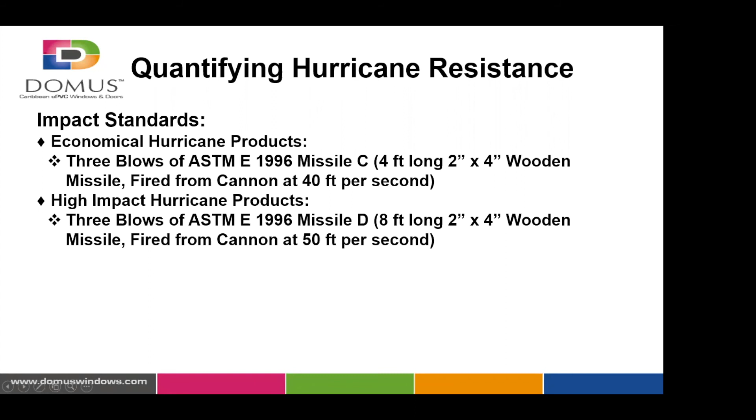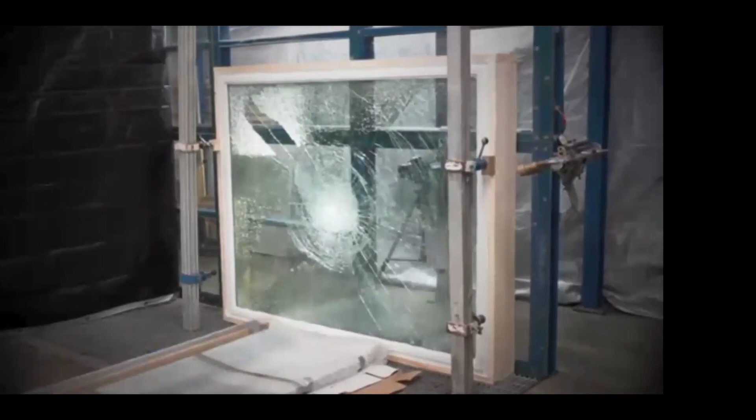The high impact products are tested with Missile D, which is twice the length and fired from a cannon at a faster speed. Now you see this is a large unit, and a lot of people would think the bigger the window, the more vulnerable it is. It is more vulnerable from a wind load because the area is larger, but actually from impact, the larger the window, the more the laminate has time to stretch and absorb the impacts.

Now this is an example of what it looks like from human intervention. I think you need a bigger hammer.

Try again. You're not getting in very well.

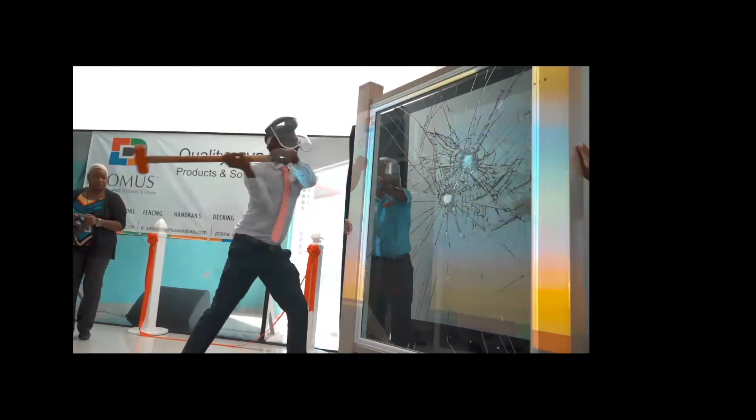This shows the strength of the laminate and high impact also provides very good security, but that is overkill for a number of people. If you can't afford everything, at least get protection from the wind load, because that is probably the most damaging part of these intense hurricanes.

Now flooding, Jamal mentioned earlier, can also be highly destructive. You need to find out if you're in an area where it has flooded, and what about drainage. If you're in a relatively flat area, you can protect yourself against flooding: seal the exterior of the building above historic levels, install shut-off valves in the main sewage, otherwise you'll get backflow, and put in a flood-resistant door.

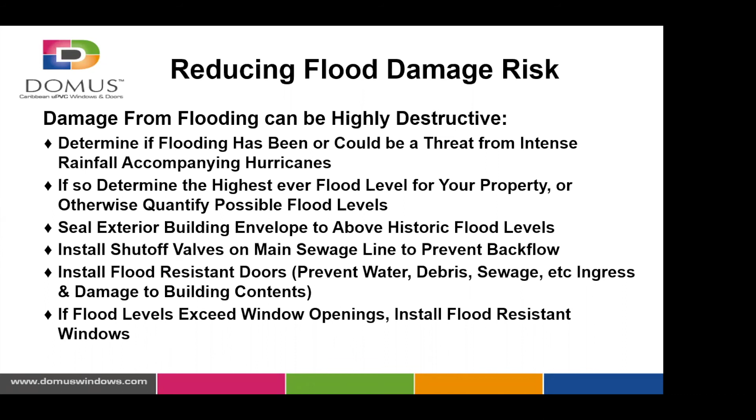Now, if the flood levels exceed 2 or 3 feet, that's typically the most common, then you're really going to have to work at it to make the house resilient.

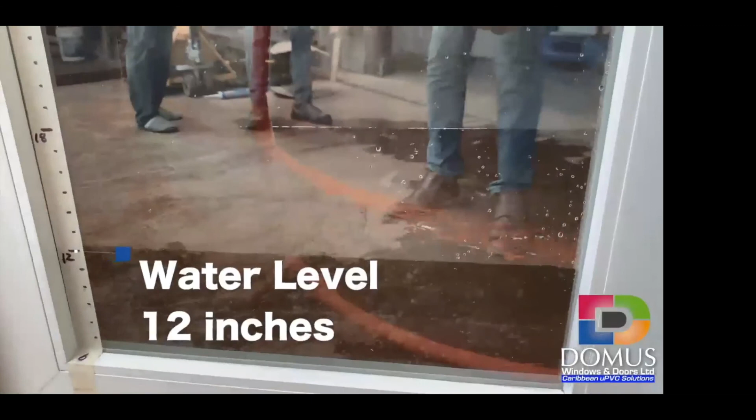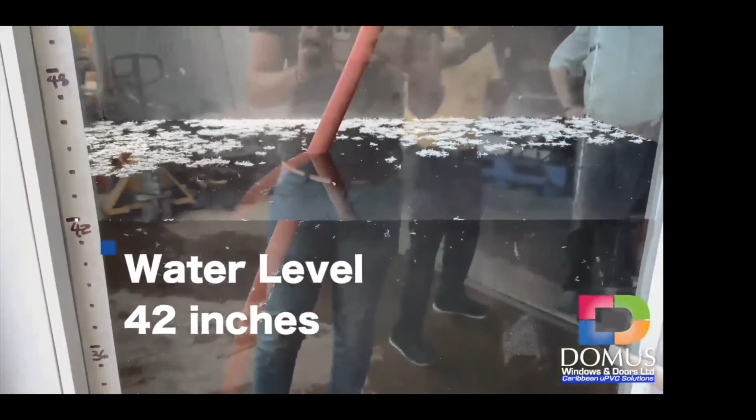So this is one of our impact doors, a hurricane door. It also turns out that it performs very, very well - it's perfectly dry, even with flooding. Most floods are only 12 to 36 inches, so it's best to be put up to that level. If you protect from the hurricanes, you can also protect from flooding as well.

Having spent 15 years in this business in the Caribbean, and having traveled to most of the islands, dealt with governments and institutions, it's amazing how many individuals are still unaware of what causes building failure and how to prevent serious damage. Hurricane risk is real, and the consequences of a severe hurricane strike can take a life or have a lasting, grave economic impact.

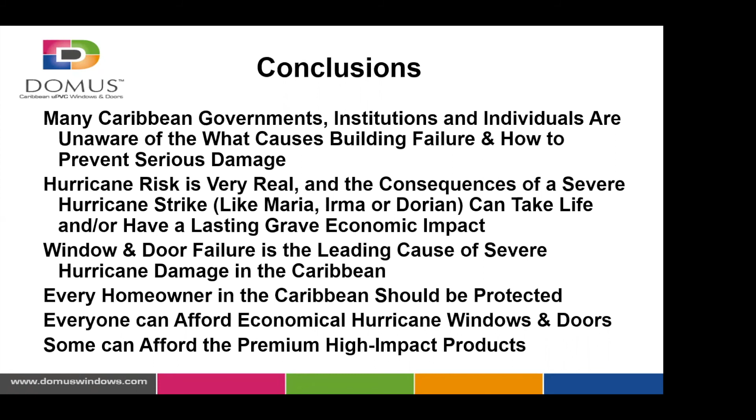Window and door failure is the leading cause of severe hurricane damage. Again, from these intense storms, it's wind load, wind load, wind load. Every homeowner should be protected - everybody can afford the economical stuff, and if you want premium, go for that. The last thing is, if all else fails, make sure you've at least got insurance, even as a renter. That's kind of the last line of defense.